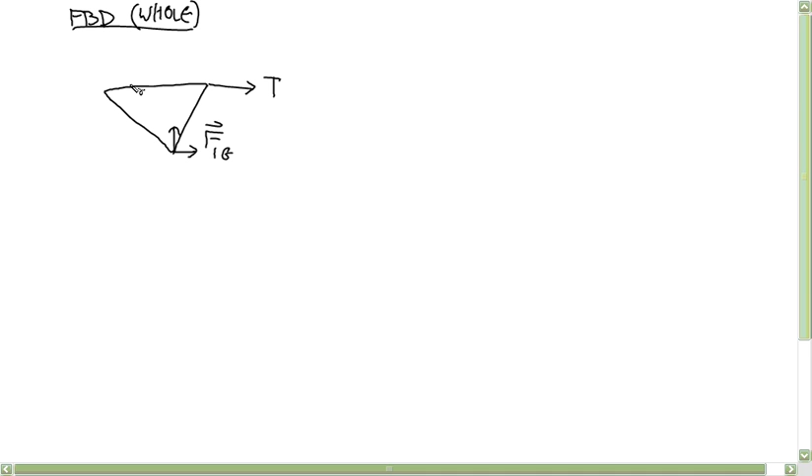And what other loads? Yep, and then the distributed load, we can treat that as just a point force. This right triangle has a length of 1, a height of 10,000. So 5,000 is the total force.

Okay, and that's a complete free body diagram.

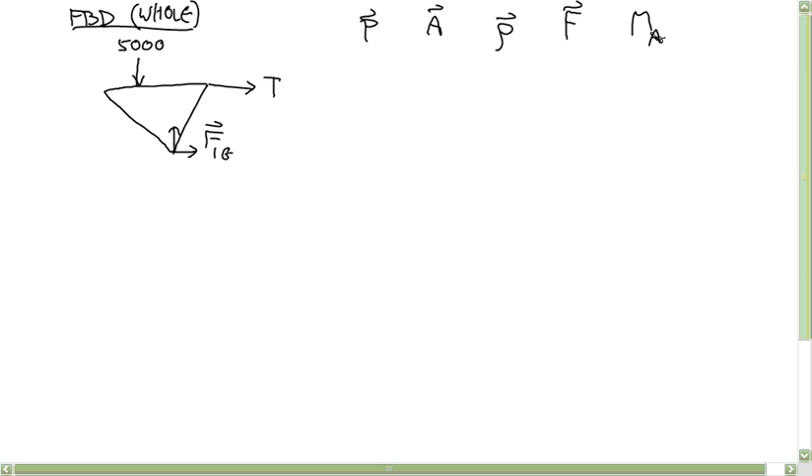Okay, let's put the coordinate system. Yeah, let's put it at the pin. I think that seems to make it the easiest. And let's choose the about point at the pin for this too. So this force at the pin is at the origin. The about point is the origin. So rho is 0.

F1gx, F1gy, and 0 moment. And then this 5,000 Newton force, where does that act?

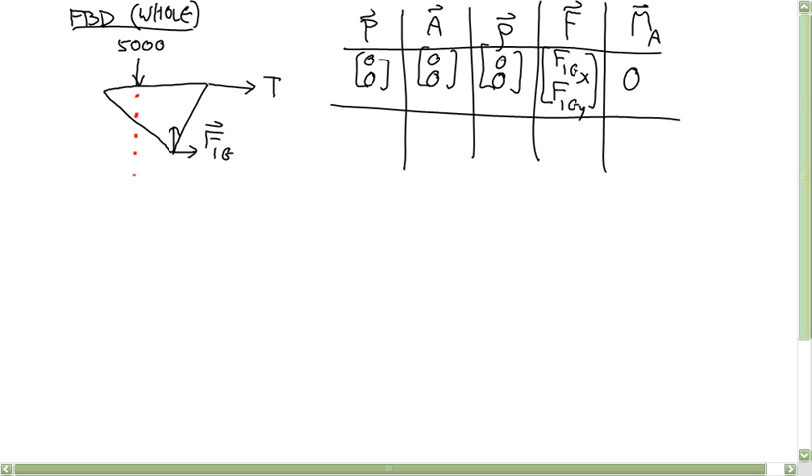Remember we can put this anywhere along this line, right? So I'm going to put it at 0y and then a sixth of a meter x, negative I guess. So what's a sixth? Okay, so negative 0.1667, and I'll put it at 0.

About point is here. So rho is 0.1667, 0. The force is 0, negative 5,000. So the moment is a sixth of 5,000, which is... and that's 1666. Is that right? No, that can't be. That should be, I must have that somewhere.

833. And positive. What? Decimal places in the wrong spot. It's 800. Oh yeah, thanks. Yep.

Okay, and then the last force is this tension. That's acting at, we can put that at 0x, right? Because of the same thing. So 0, and then the height is 0.866. About 0, 0.

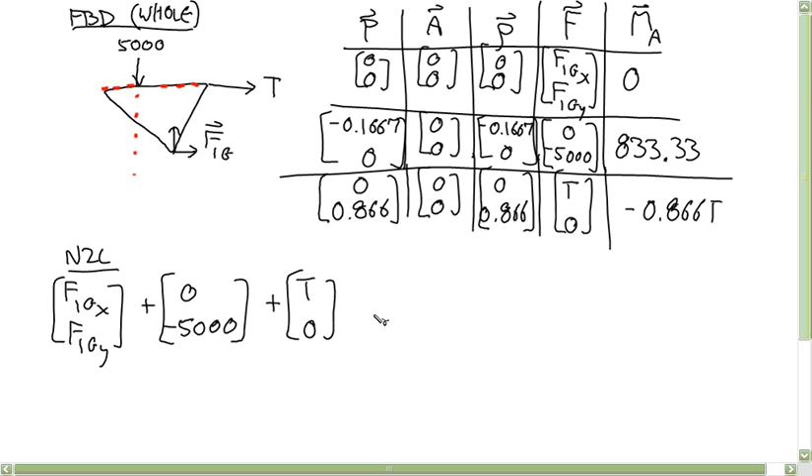And the rotational equation says 833 minus 0.866 T is equal to 0. Just to cut down on the big matrix that we have to solve at the end, I'm going to take advantage of the fact that right here we have 3 equations and 3 unknowns and just solve for these now.

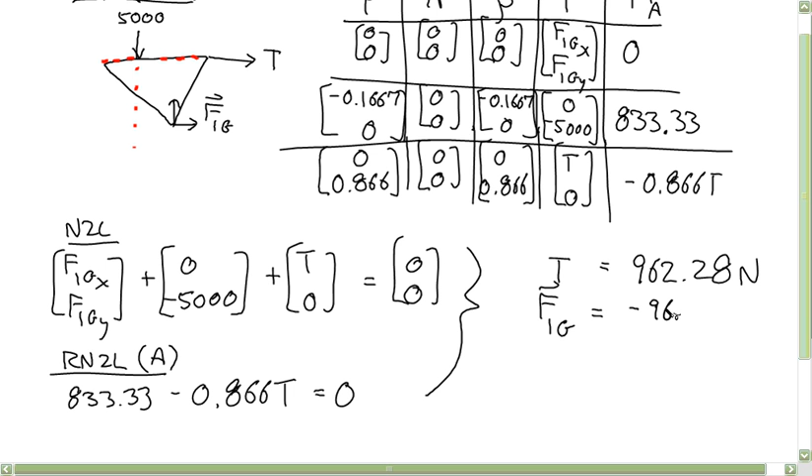So that gives us T is equal to 962.28, and F1G is negative 962.28 and 5,000. Anyone still with me after that step? Got that result? Nice, all right.

So now let's isolate member 1. This would work isolating any 2 of the 3 members. I did 1 and 2.

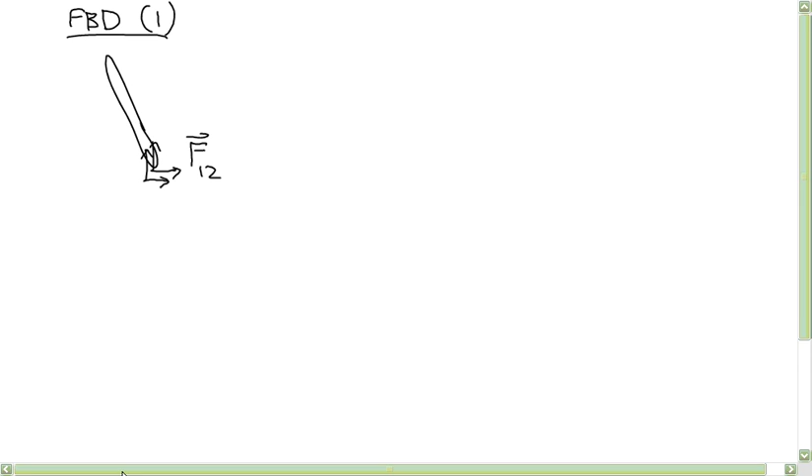Okay, so what forces are acting on member 1? That's right, that's exactly right, because we're treating the pin as if it's part of member 1. So that ground force acts on member 1, and member 2, right. So we have the force on 1 by 2. And then we also have that ground force that we just calculated. That's negative 962, 5,000.

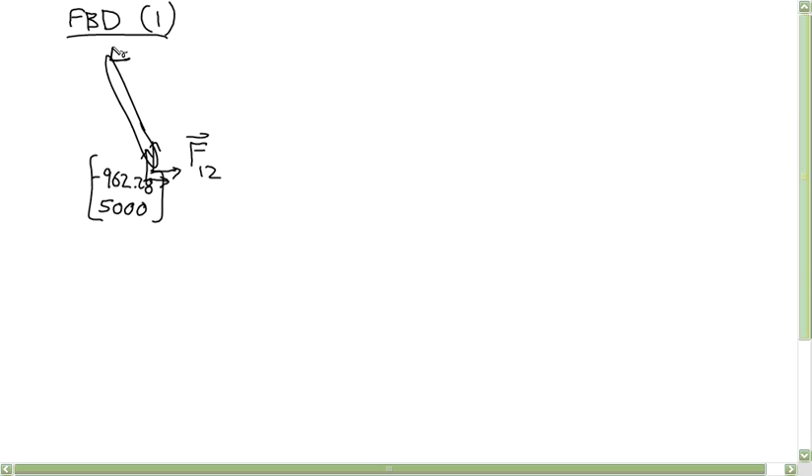And what else is acting? 3. Force on 1 by 3. Okay, and nothing else.

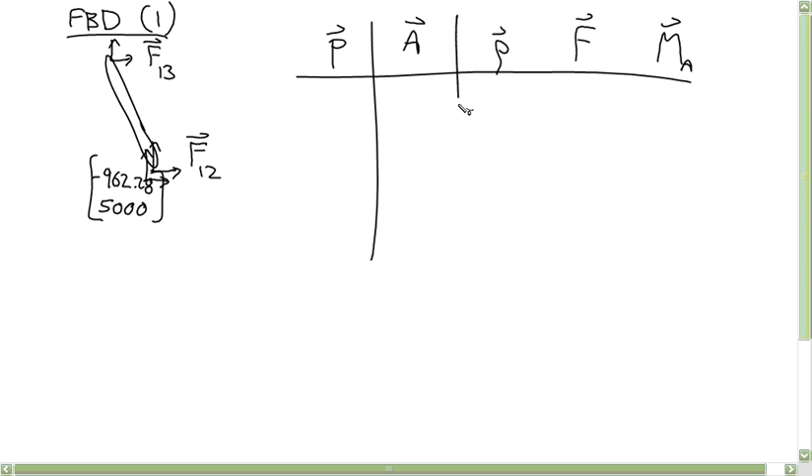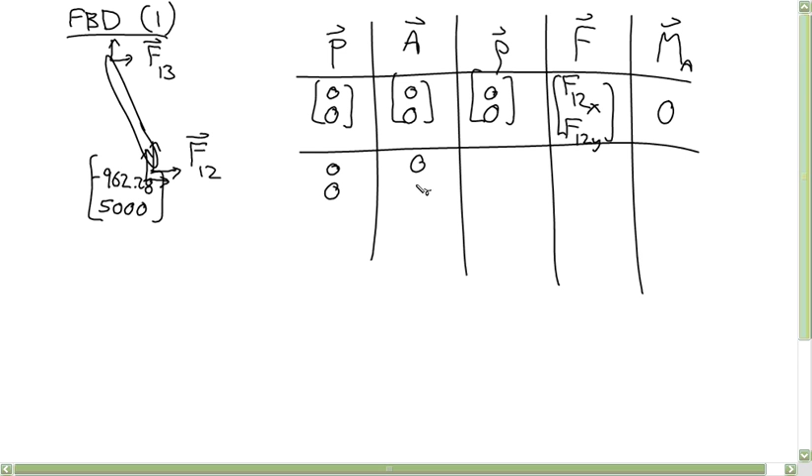I'll choose the same about point for this one. We'll get rid of 2 of those force vectors when we calculate the moments. So acting at 0,0 with the same coordinate system, we have F12x, F12y, and we have negative 962.28, 5,000, 0.

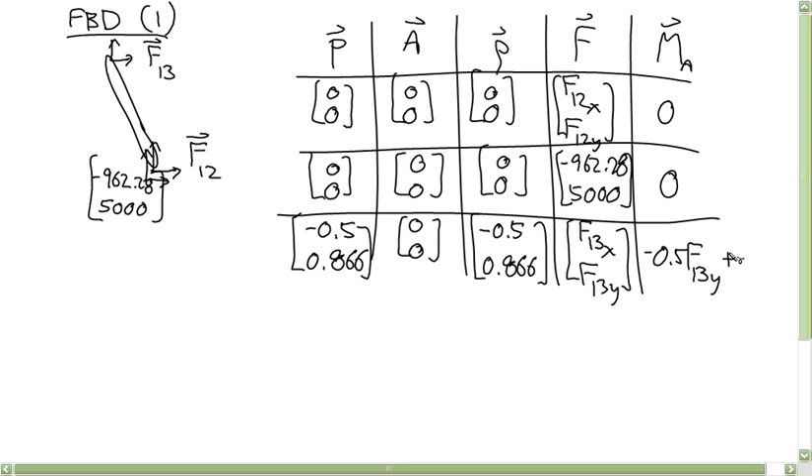And then up here, this is at negative 0.5, positive 0.866. So our rho vector is negative 0.5, positive 0.866. The force is F13x, 13y. So we got negative 0.5 F13y plus 0.866 F13x.

So Newton's second law is 12x, 12y plus negative 962, 5,000 plus 13x, 13y is equal to zeros.

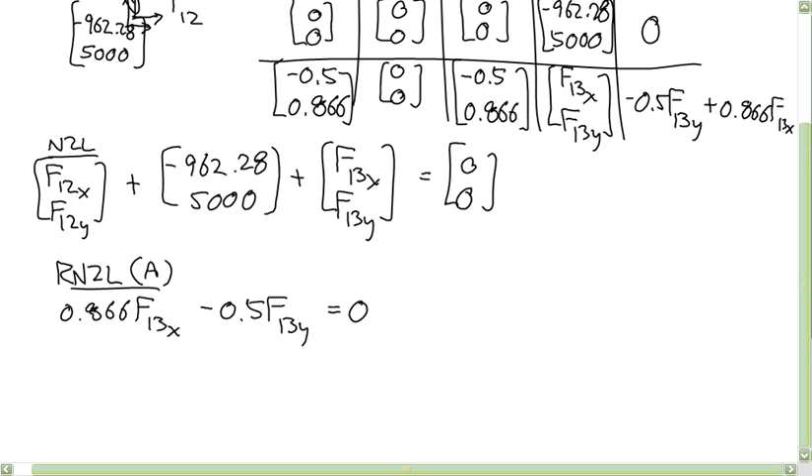And then we have 0.866 13x minus 0.5 13y is equal to 0. Okay, so now we can sort of do that inventory step that we didn't do last time because we just solved everything we had. So we didn't build up any variables. Okay.

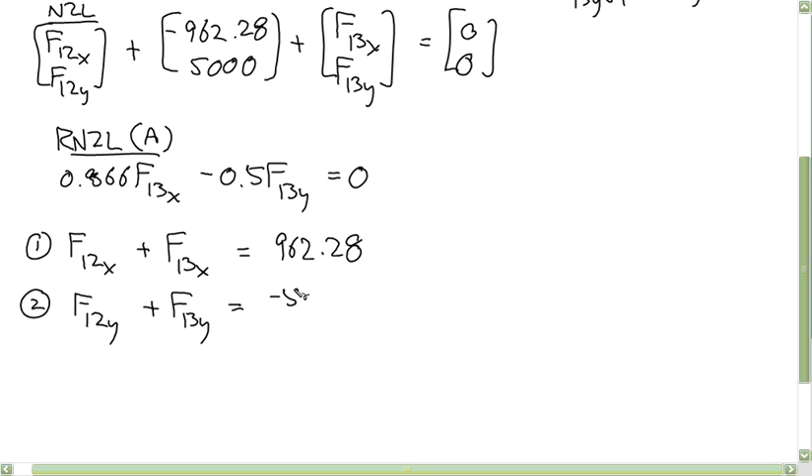So we have three equations. 12x plus 13x is equal to positive 962.28. And 12y plus 13y is equal to negative 5,000. And then 0.866 minus 0.866 times 13x minus 0.5 13y is equal to 0.

So those are our first three equations. And how many variables do we have? We have 12x and y, and 13x and y. So far we have 4 variables.

I don't know why I did it in that order. So we have 12x, 12y, 13x, and 13y. We can't solve any more right now. Anybody have any questions about where we are, what I've done so far?

Okay, now I'm going to isolate member 2. It's interesting, and a little surprising to a lot of people, that you can do this problem without ever isolating the member with the main load. The most notable load on this whole body is that distributed load, but we don't have to isolate that member. We took that into account when we dealt with the whole body, and the reaction loads will do all the rest.

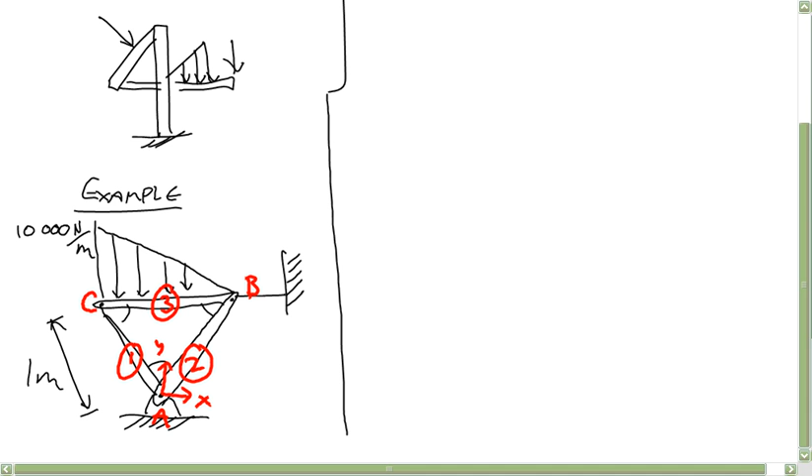And this is a key point. I tried to make this point when we looked at the last member too, and when we isolated the whole thing. The force that the ground is applying, we're saying is acting on member 1, because member 1 holds the pin. So even though in the picture it looks like that ground reaction force is acting right at the edge of member 2, member 2 doesn't see that directly. It only sees it through reaction forces. Since the pin is part of member 1, we're not going to include that reaction force for this member. That's a really key thing to notice for these kind of problems.

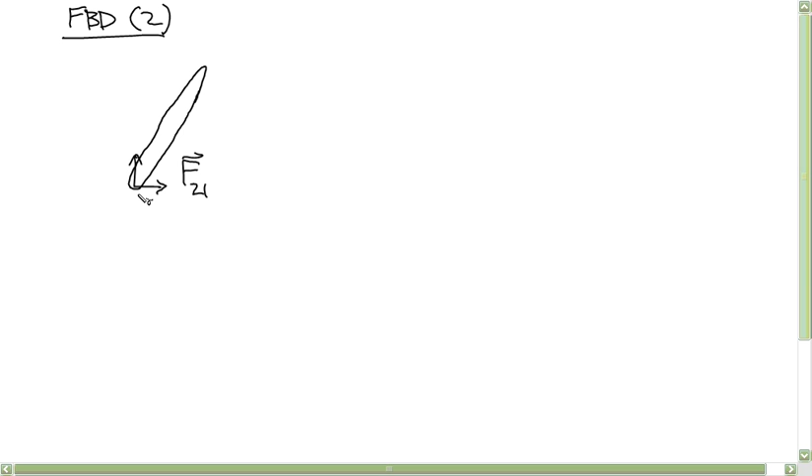What else is acting on member 2? Yep, the tension is acting because we're assuming this pin is part of member 2, and that tension is acting at member 2. So that tension is 962.28 - we already found that. And then one more force: F on 2 by 3.

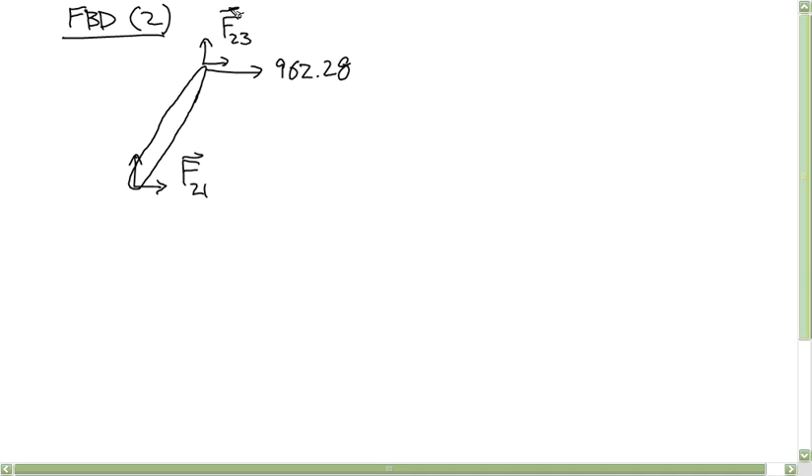Let's use the same coordinate system, same point about which we've been working. So at 0,0, all these are zeros. We have 2,1x and 2,1y, and 0 moment. And then up here at the pin, our location is positive 0.5, positive 0.866. So our rho vector is 0.5, 0.866.

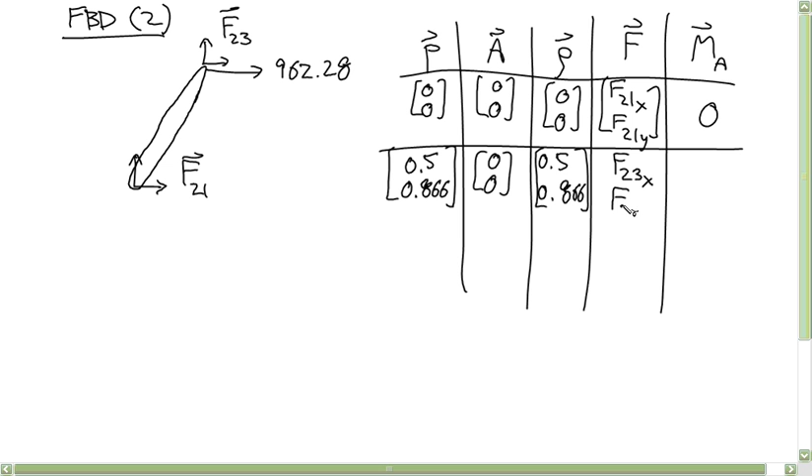Let's do 2,3 first. So we have 0.5 F23Y minus 0.866 F23X. And then same location.

We have 962, 0. And that is minus 0.866 times 962.28. Yeah, that's 833. So I'll put that in the equations.

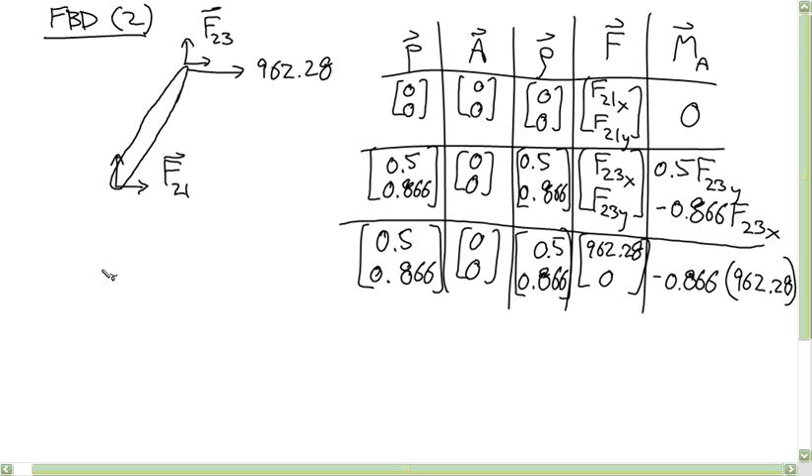So Newton's second law says: 21x, 21y plus 23x, 23y plus 962, 0 is equal to zeros.

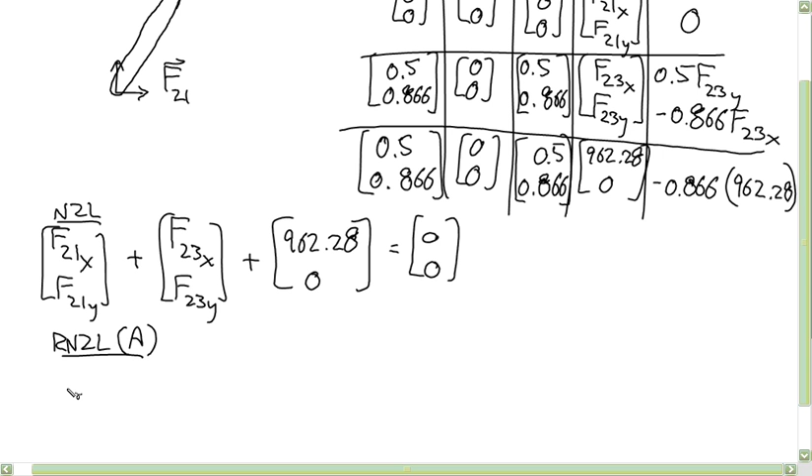And the rotational equation says: negative 0.866 times 23x plus 0.5 times 23y minus 833.33 is equal to 0.

So let's take inventory again. The variables that show up here are 2,1x and y, and 2,3x and y. Let's look back at our old list of variables and see if there are any we can replace using Newton's third law. The 2,1 we can replace with the 1,2s, right? The 1,3s and the 2,3s we can't do anything about, but we can replace the 2,1s.

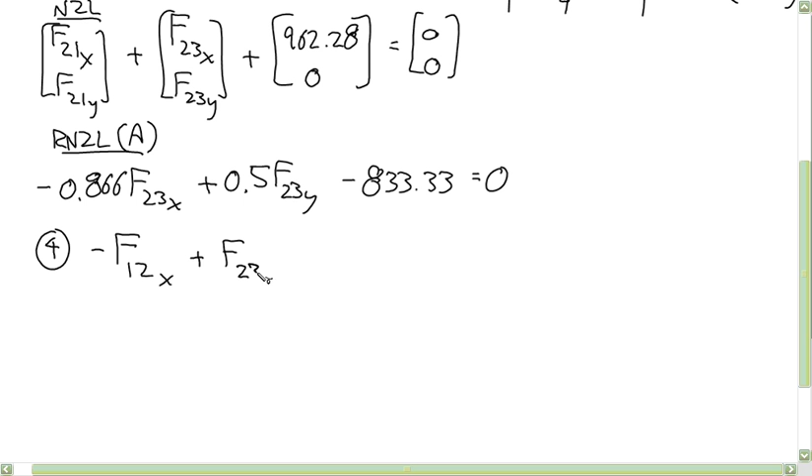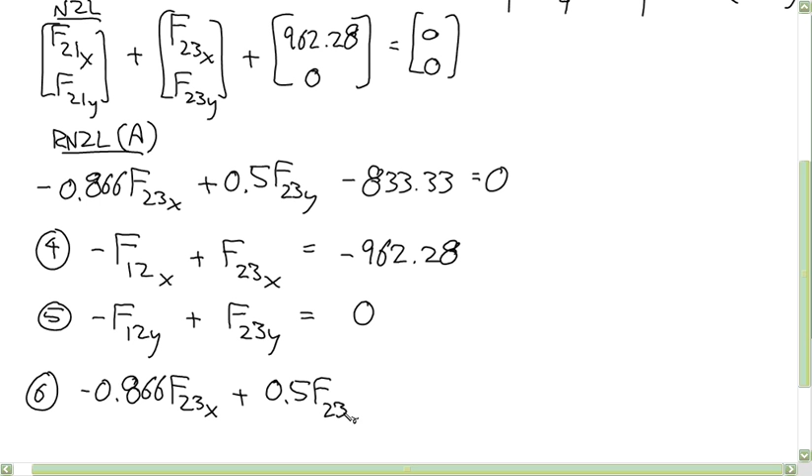So equation 4 says negative F12x plus F23x is equal to negative 962. Equation 5 says negative F12y plus F23y is equal to 0. And 6 says negative 0.866 times 23x plus 0.5 times 23y is equal to 833.33.

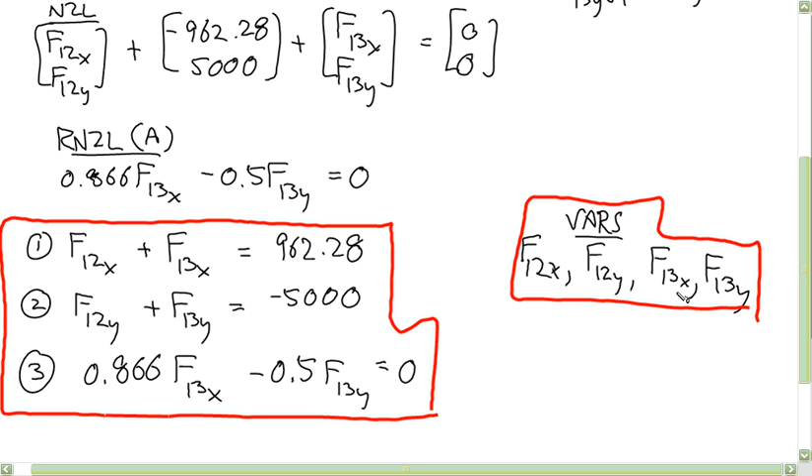Okay, so there's equations 4, 5, and 6. And now our variables are 1,2x and y, then 1,3x and y - that didn't show up in these 3, but we still have those from the previous 3 - and then 2,3x and y.

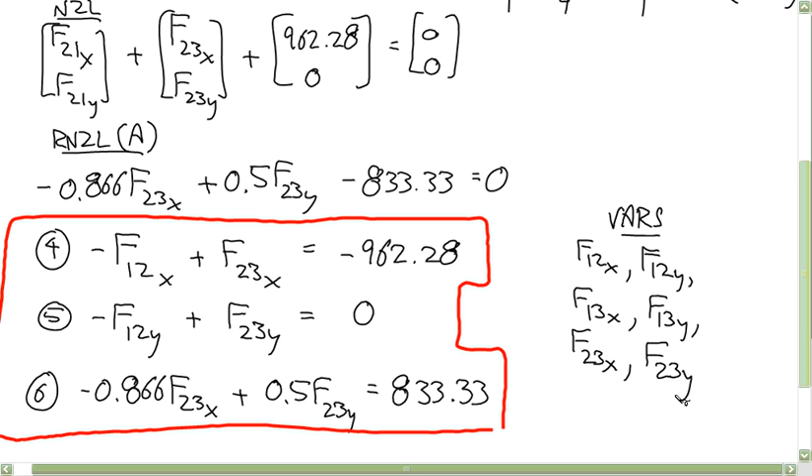Okay, so now we have 6 equations and 6 variables, so we can solve this system. I'm not going to write out the matrix, but tell me if anyone got all the way to any numbers? Okay, and so far everything looks similar to what you were doing?

If we got the same thing, that would be like a miracle. Well, I already know one of my plus and negatives is wrong. Oh, okay, I'm just trying to figure it out.

So for F12, I got negative 962.28, negative 1666. For F13, I got 1924.56, negative 333, and another 3. Another 3? That's enough.

And then for F23, 1924.56, negative 1666.

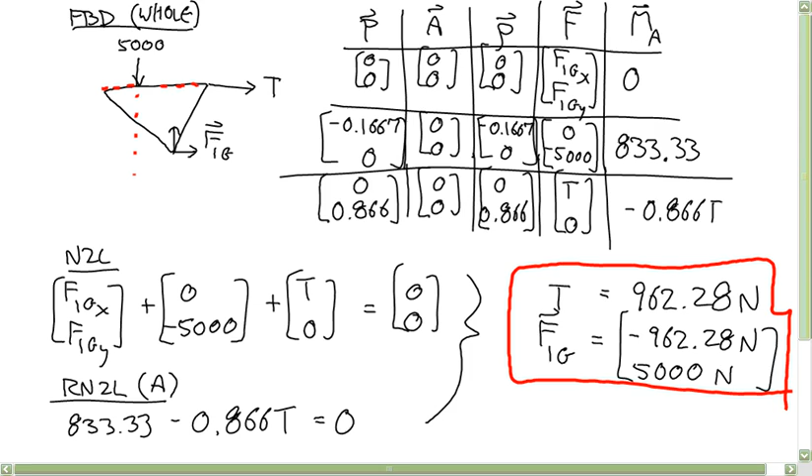Anyone get that? I was wondering, go back to number 1, for part 1 there - just isolating the first member, for the moment. I didn't quite understand how you got the negative 0.5 F13, and then you added 0.866 F13.

Okay, so in 2 dimensions, this cross product is just down these 2 minus up these 2. So negative 0.5 F13Y - and then, oh, that should be negative, shouldn't it? That's what I was... yep, you're exactly right. And did I maybe write that?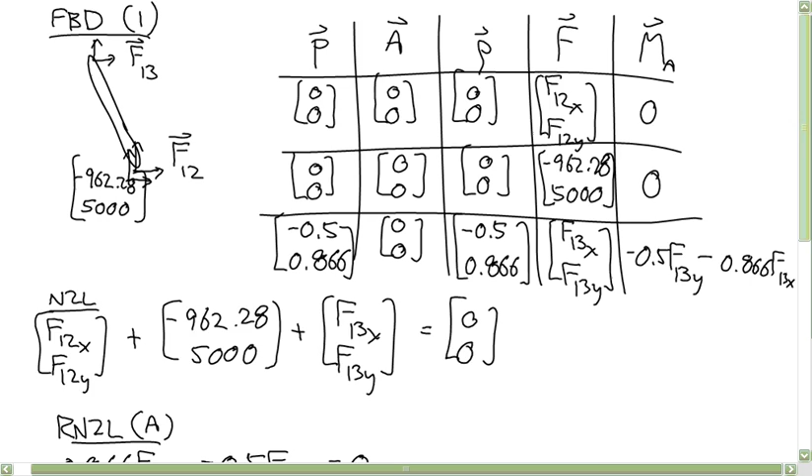Yeah, so that should be negative. I did that in my notes, so I think those answers are still right. So this should be negative. And that means that equation 3, this should be negative.

Okay, yeah, thanks. Any other questions? This is the last example I'm going to do in class, out like this. Maybe thankfully for most people, but the sad thing is this is the way to iron out the mistakes. So take advantage of the last one if you have any questions. And if you have any questions about this later, watch the video or look at the notes.

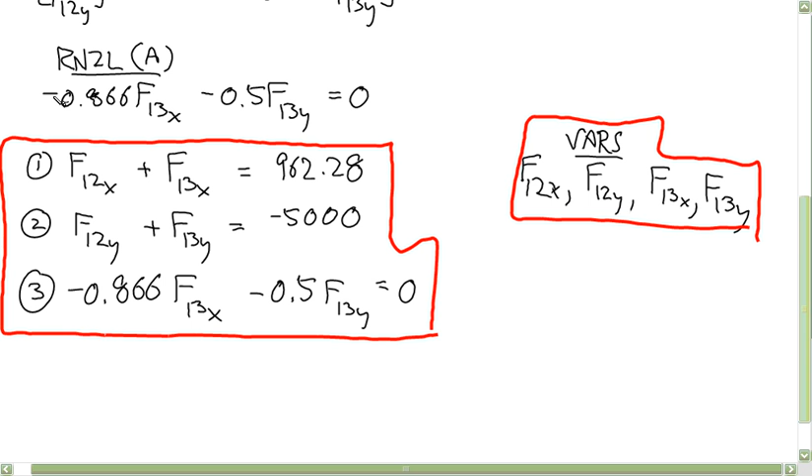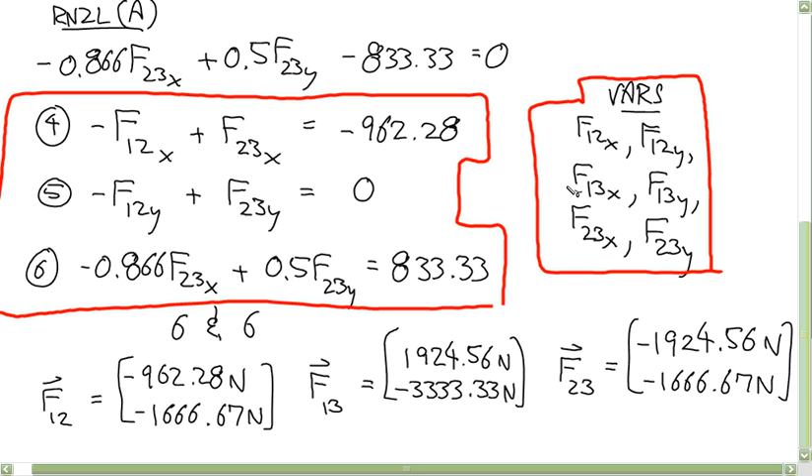Maybe try to do it yourself if you have time, because this is an example where everything is done, with explanations given as I go. All right, I guess the last thing I'm going to do, I didn't expect this to take nearly this long today. I guess this is all we're going to do in class today. So I'm just going to take these forces and apply them back to the members so we can see what those individual members look like.

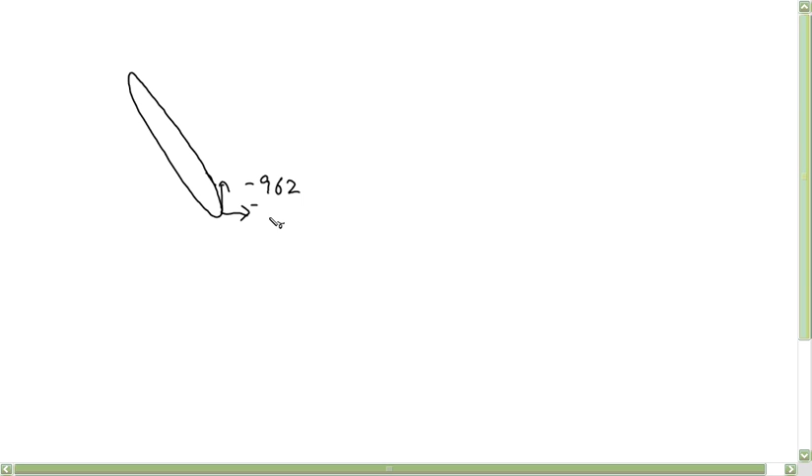And then there's the ground force, which is, yep. Okay, and so you can add those up. Those are acting at the same point, right? So if you're trying to figure out the loads acting on this member, just add those two together.

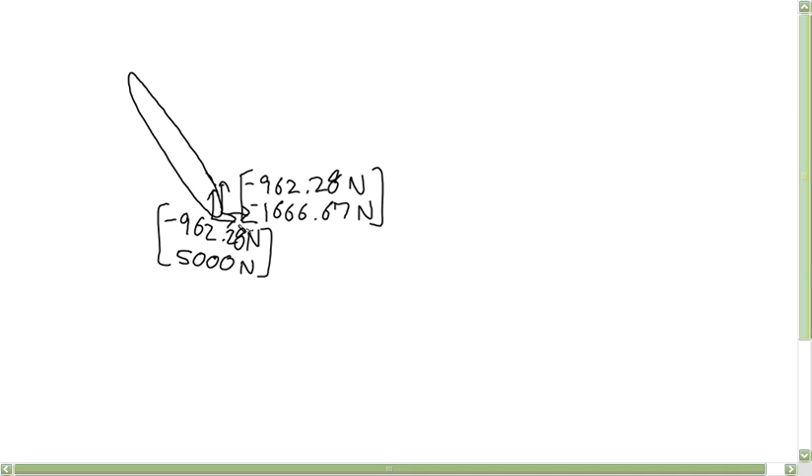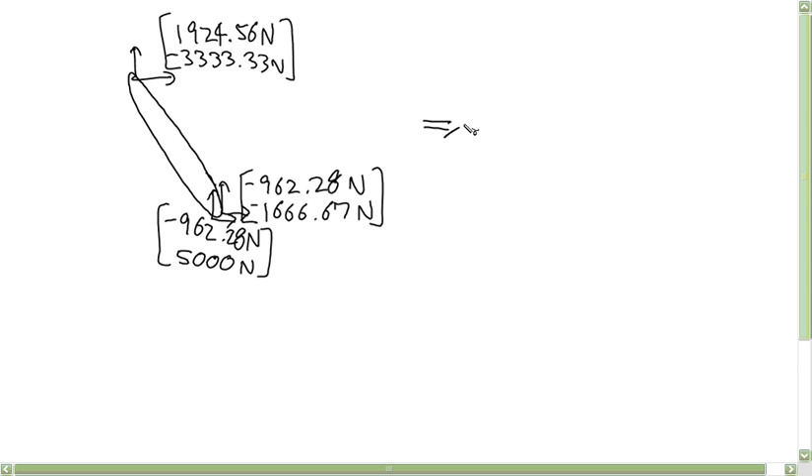And then there's a load up here of, yep, and so that's 1924.56, negative 3333.33. Okay, so you could rewrite that as 1924.56, negative 3333.

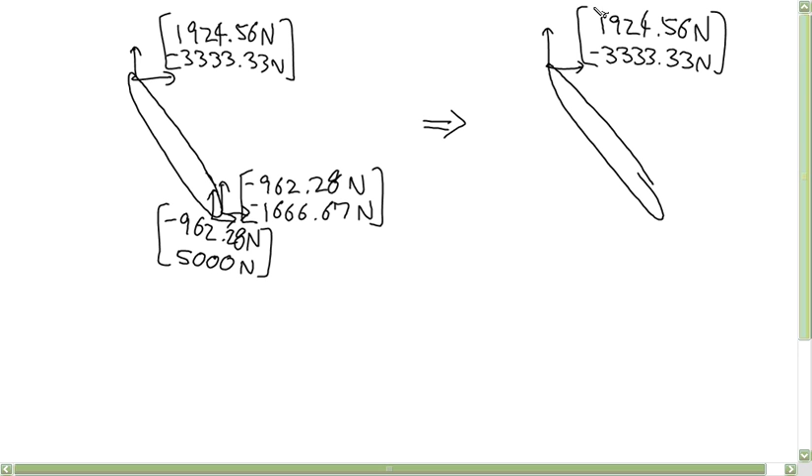And then this force is just negative, what's that, 1924.56, positive 3333.33. Okay, so that's the external loads on that member. And that member, if you did Newton's second law and the rotational equation, that's in equilibrium if our answer is right. So that's another way you could go back and check everything with your numbers.

And when we get into internal loads, which is the next topic we're going to get to after structures, we could then go in and see where this thing is most likely to break due to bending, where this thing's most likely to break due to tension and compression.

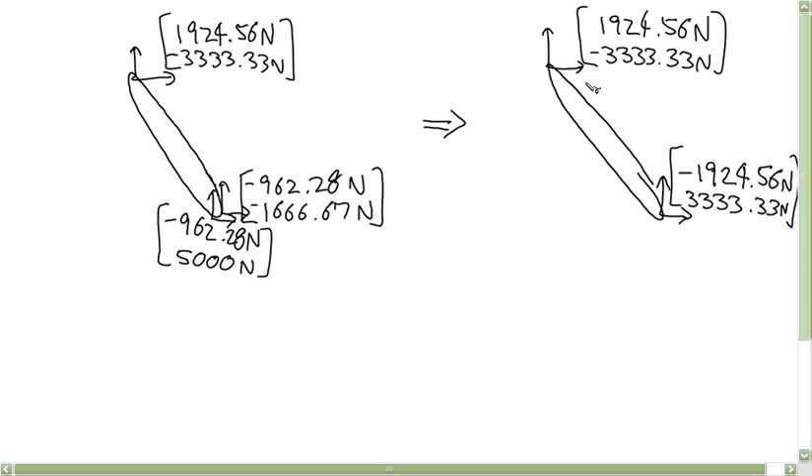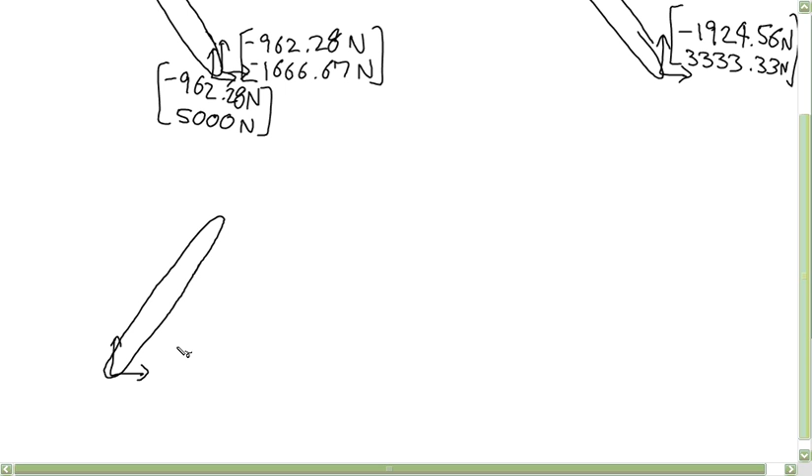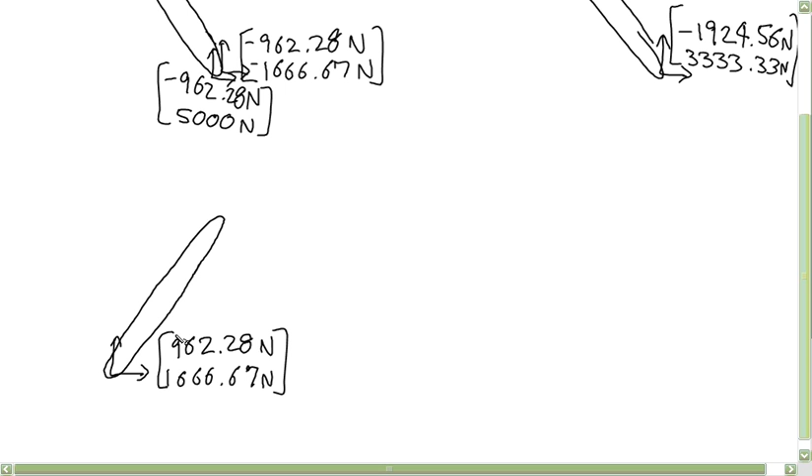Okay, what loads are acting on member 2? We have the opposite of this force. F21 is just negative F12, so positive 962.28 and positive 1666.67. And then we have up here F23, so negative 1924.56, negative 1666.67.

And what else is acting on this? Yep, that tension, and that's 962.28. And these two are happening at the same point, so we could rewrite this as: this force is unchanged, 962.28, 1666.67.

And then this force of negative 962.28 and negative 1666.67.

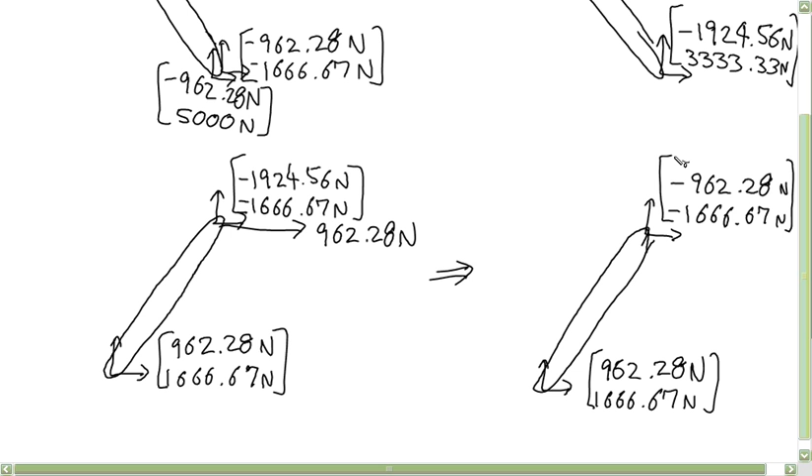And notice that now both of these are two force members once you add up all those forces. Okay? And so if you calculate the directions, like get unit vectors for these force vectors, all four of these forces have to be directed along the line between those 2 points, right? That's always a property of two force members.

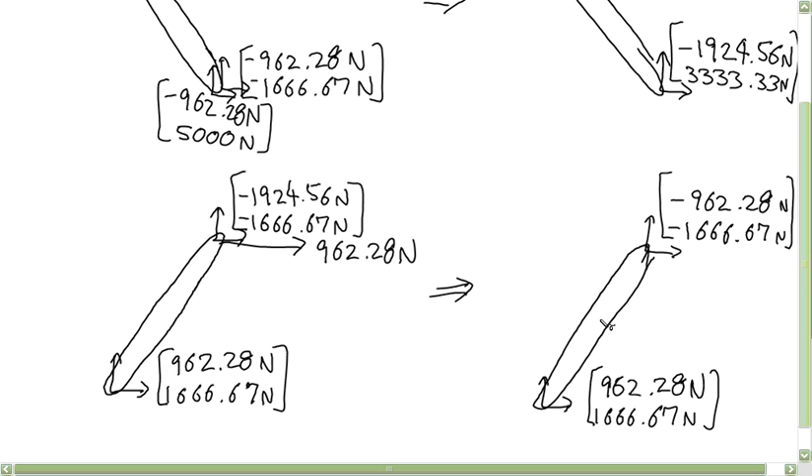And also, two force members can't have weight included, right? Because, unless one of the forces is the weight. So you can't use that way of analyzing two force members on anything where the weight's included.

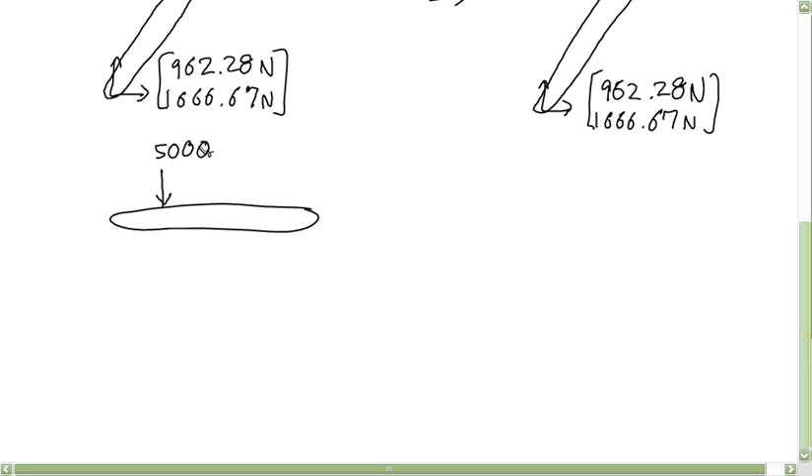And then finally, this one. What forces are acting here? We have that 5,000 Newton force due to the distributed load. We have a force here on 3 by 1. Yep. Give the numbers for that. So on 3 by 1, so that's negative 1924.56 and 3333.

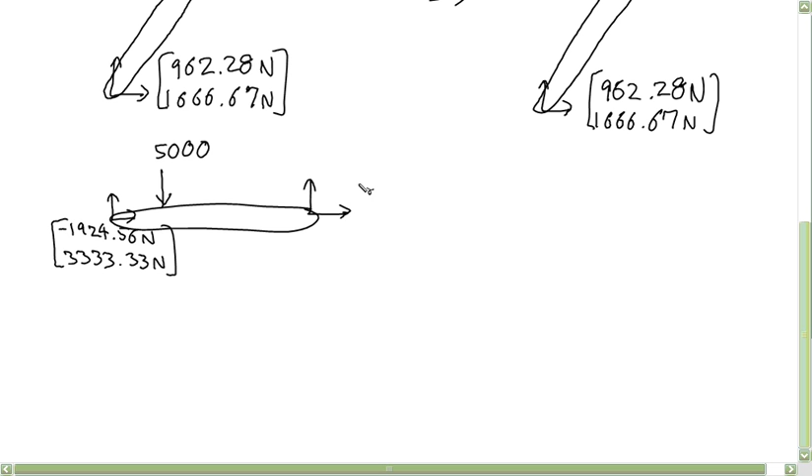And over here, yep, so 3, 2, so that's the opposite of 2, 3: 1924.56 and positive 1666.67 newtons. And are there any forces we can combine here? Okay, that's that same point again. Okay, that tension, by our convention, we chose for that tension to be applied to body 2, so we don't see it here.

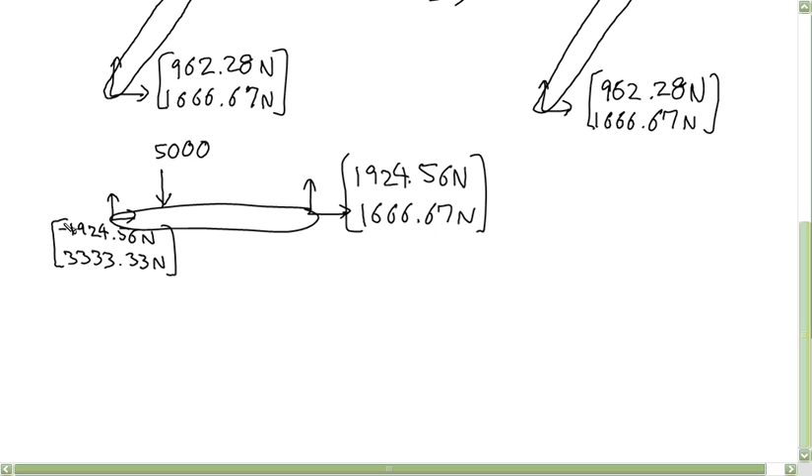All right, any questions? All right, that's pretty much it for structures, but I am going to start next time by just talking about how the book treats trusses. So you have that in your notes and you have the idea of how that simplification works.